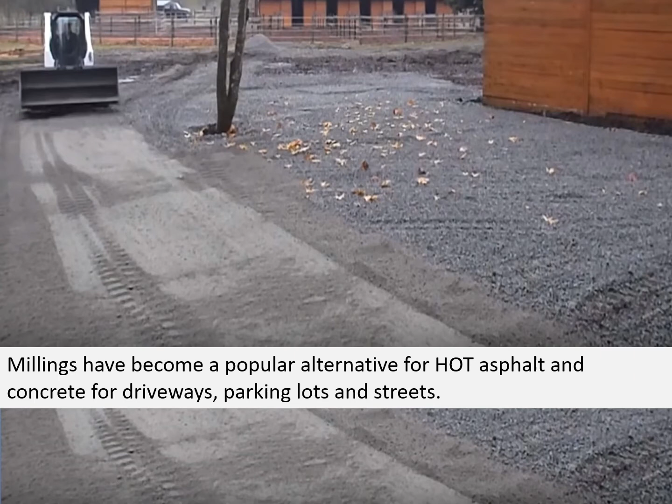In this tutorial, we'll talk about construction tips for laying and rejuvenating asphalt millings. Millings have become a popular alternative to hot asphalt and concrete for driveways, parking lots, and streets. We receive many questions in regard to constructing and handling millings. We hope this tutorial will be a benefit to you as you consider using millings for your project.

Getting a smooth, non-erodible, non-raveling, non-tracking surface has been a challenge, and these are the two most common complaints of using millings. We will share the solution with you in this tutorial. Millings have no structural strength of their own and rely on a solid base for support. When grading in your road, consider cutting in the road to provide natural support for the shoulders of the millings and eliminate or reduce the amount of dirt for backfilling and landscaping. And good drainage is very important.

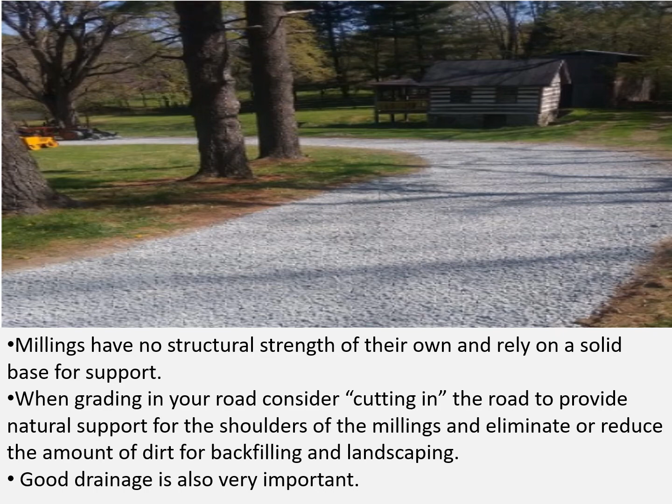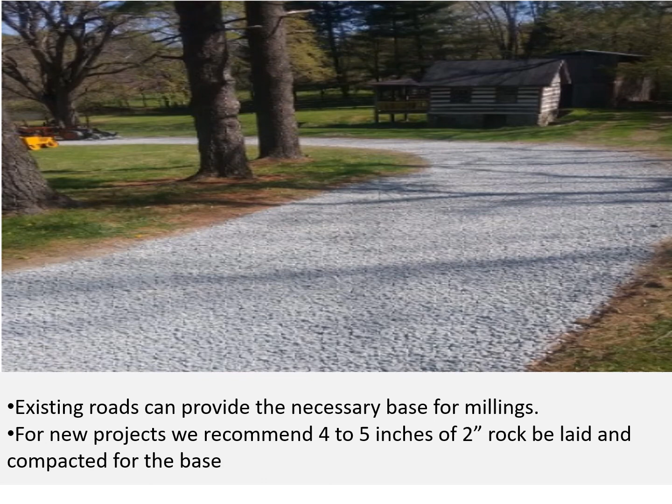Existing roads can provide the necessary base for millings. For new projects, we recommend 4 to 5 inches of 2-inch rock be laid and compacted for the base. Screened millings are preferred for a smooth finish. We recommend 3 to 4 inches of screened millings. You want enough millings depth to prevent bringing up gravel or dirt during the leveling and grading, as well as while you're incorporating the HS-E Blend.

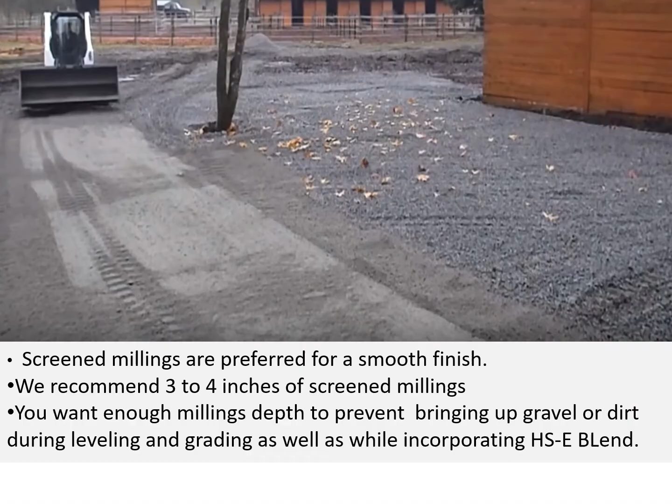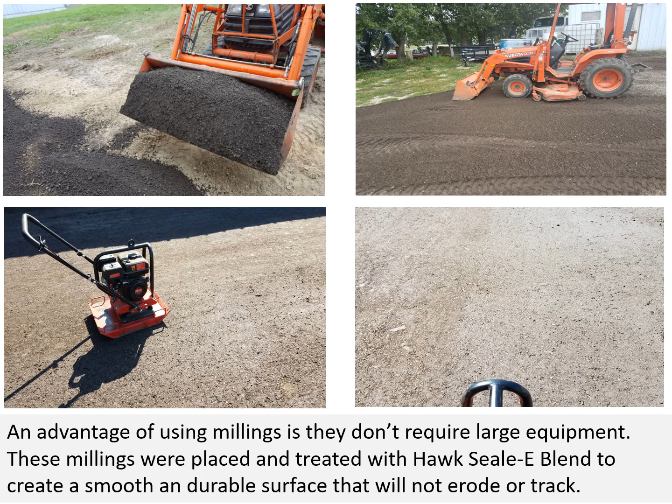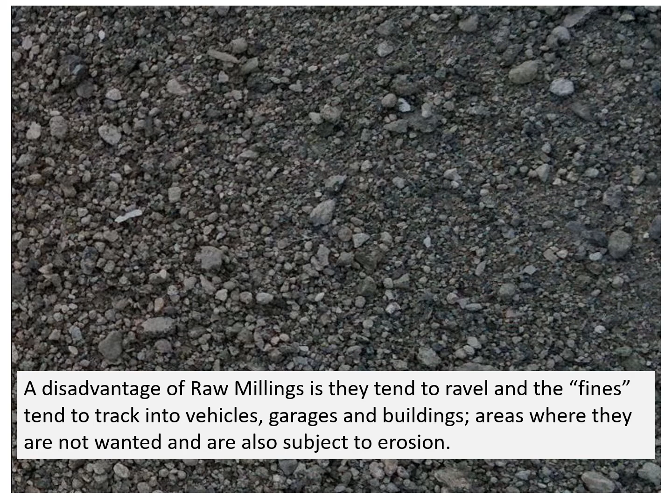An advantage of using millings is they don't require large equipment. These millings were placed and treated with Hawk Seale-E Blend to create a smooth, durable surface that will not erode or track. A disadvantage of raw millings is they tend to ravel, and the fines tend to track into vehicles, garages, and buildings, areas where they're not wanted, and they're also subject to erosion. There's nothing more disappointing than having your wife's new carpet ruined with asphalt from your money-saving millings project.

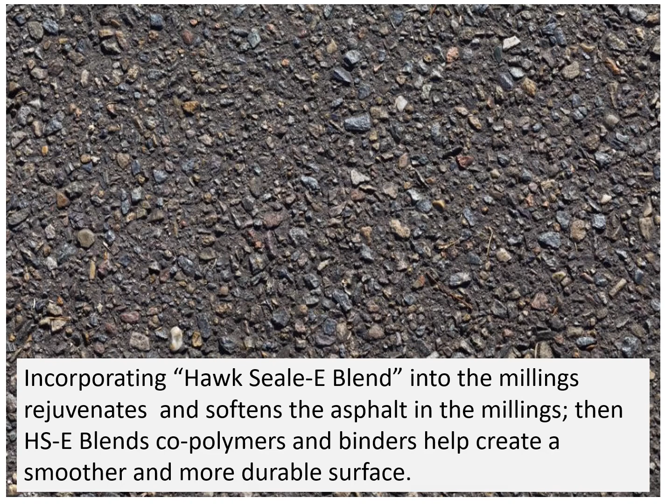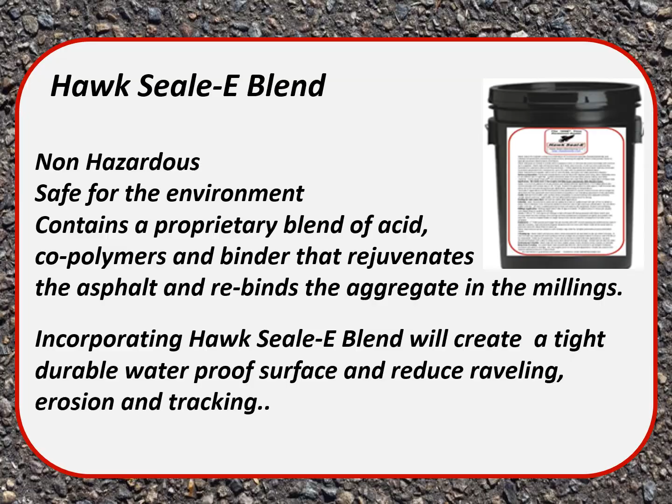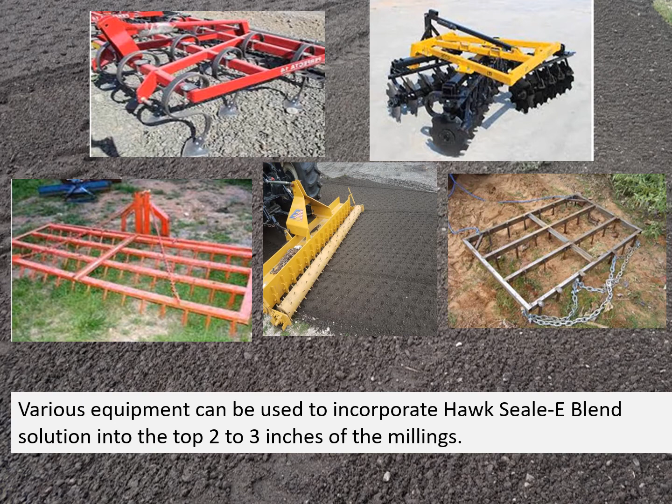A good driver can tailgate spread your millings, eliminating a lot of time and labor to prepare your project. Incorporation can be done with a variety of equipment. You can use field cultivators, discs, heavy drags, or specialized tools such as the pulverizer in the center picture. You can pull them with a small garden tractor or four-wheeler or a larger farm tractor. Basically, it's a simple matter of just getting that solution incorporated into the top 2 to 3 inches of the millings.

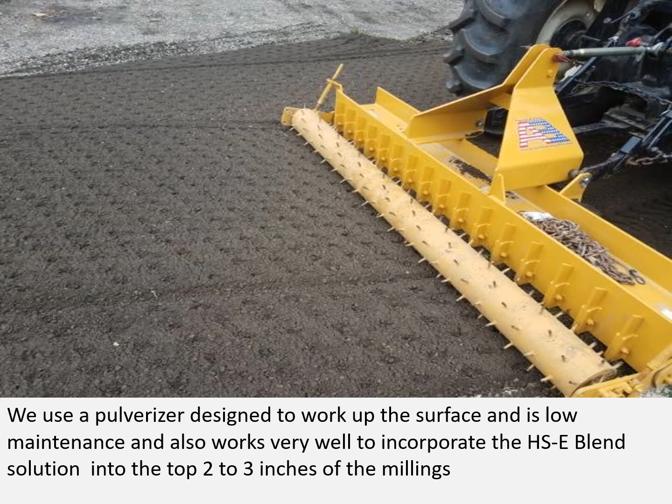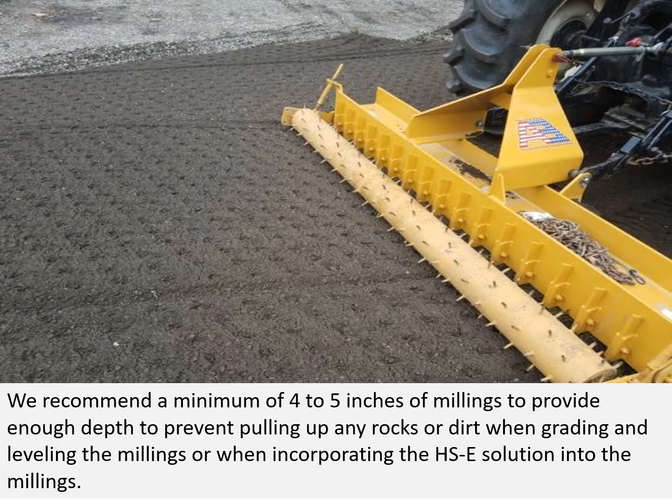We use the pulverizer. It's designed to work up the surface and is low maintenance, and also works well to incorporate the Seale-E Blend solution into the top 2 to 3 inches of the millings. We recommend a minimum of 4 to 5 inches of millings to provide enough depth to prevent pulling up any rocks or dirt when grading and leveling the millings, or when incorporating the Seale-E solution into the millings.

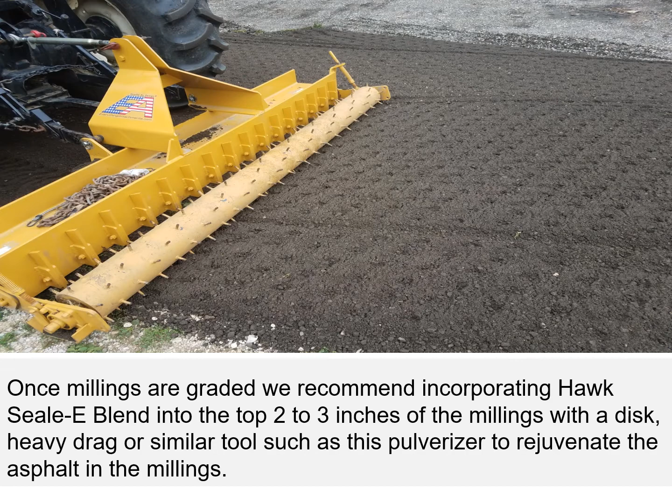Once the millings are graded, we recommend incorporating Seale-E Blend into the top 2 to 3 inches of the millings with a disc, heavy drag, or similar tool such as this pulverizer to rejuvenate the asphalt in the millings. Incorporating a total of 1 gallon of Seale-E Blend solution in 3 separate passes will maximize the saturation and penetration. When treating millings that have been previously laid and compacted, they will typically not absorb more than 0.8 of a gallon of solution per square yard before it begins to puddle and run off.

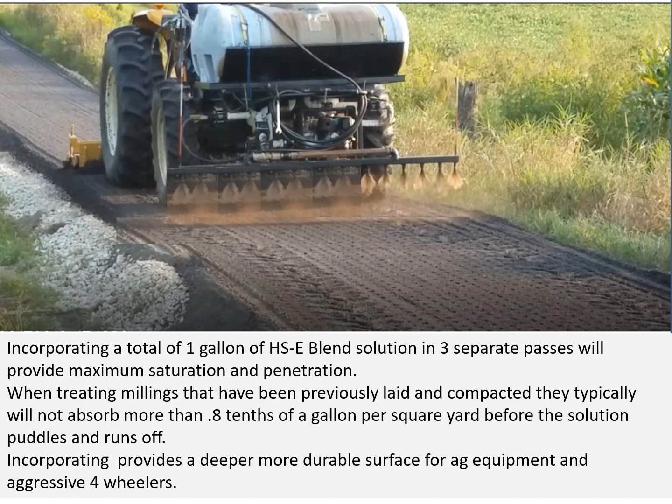Incorporating provides a deeper, more durable surface for ag equipment, aggressive four-wheelers, and probably heavy industrial areas where you have semis turning. This is the third and final pass. Notice the solution is beginning to puddle in the tractor tracks. The millings at this point will become like a slurry similar to poured concrete.

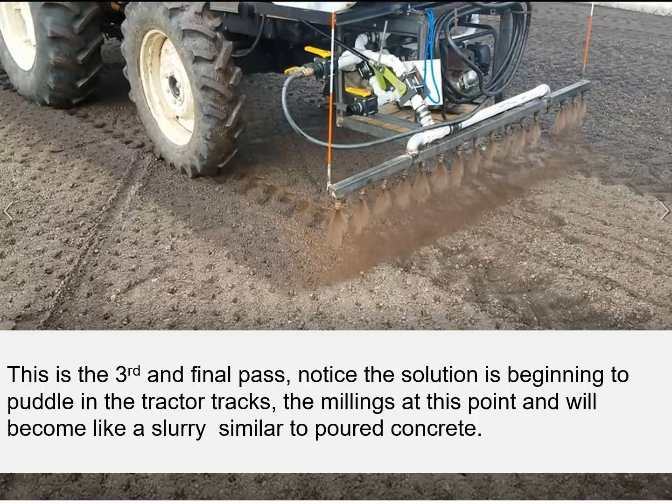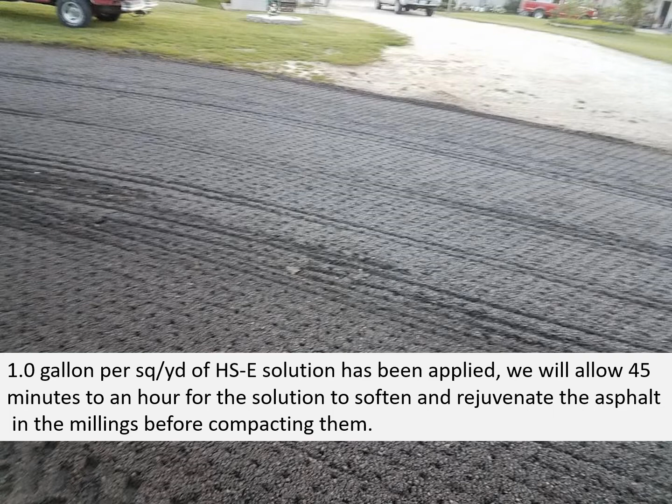1 gallon per square yard of solution has been applied here, and we will allow 45 minutes to an hour for the solution to soften and rejuvenate the asphalt in the millings before we start to compact them. The millings will need to set up enough to carry the weight of the roller without rippling the millings ahead of the roller. Otherwise it squishes out, and you don't want that. We recommend compacting the millings several times in the first 24 hours.

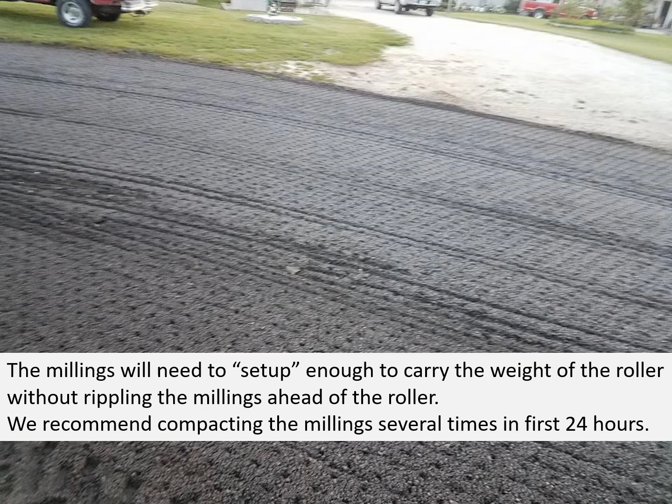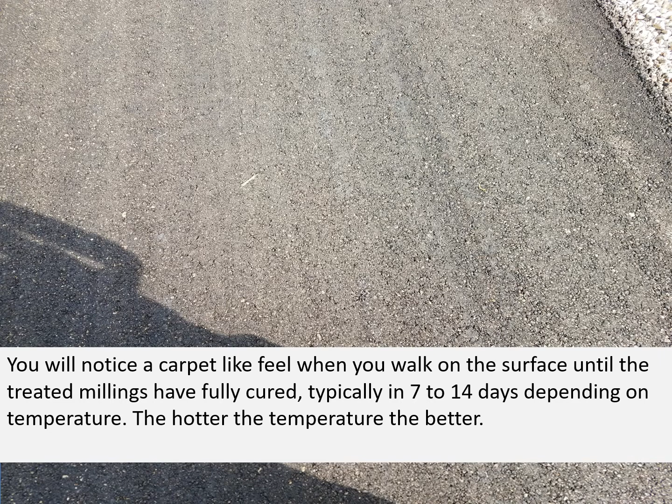Light traffic such as cars and pickups can begin immediately. Overnight parking and heavy garbage trucks and farm tractors with aggressive tires should be avoided until the treated millings have fully cured. You will notice a carpet-like feel when you walk on the surface until the treated millings have cured, typically in 7 to 14 days depending on the temperature. The hotter the temperature, the better, and the faster it will cure.

Many times property owners contact us after they have laid and compacted their millings, wanting to know if Hawk Seale-E can be used to seal them. While incorporation provides a deeper, more durable mat, you can apply Hawk Seale-E over the top of compacted millings. Some of our farm and commercial customers have worked up the compacted millings to incorporate the recommended 1 gallon of Hawk Seale-E solution in the top 2 to 3 inches. Incorporation provides a deeper, more durable surface, especially where heavy vehicles and equipment are involved.

After incorporation of Hawk Seale-E, the millings are then recompacted when the millings have set up enough to carry the roller without rippling the millings ahead of the roller. Compaction can be done with a heavy, smooth-tired vehicle as well. We recommend compacting the treated millings several times in the first 24 hours.

Previously compacted millings can be sealed by applying 0.8 of a gallon of Hawk Seale-E solution with a heavy nap or foam paint roller. For larger areas, you will want to use a simple sprayer system. We recommend recompacting the millings 45 minutes to an hour after application to tighten the surface.

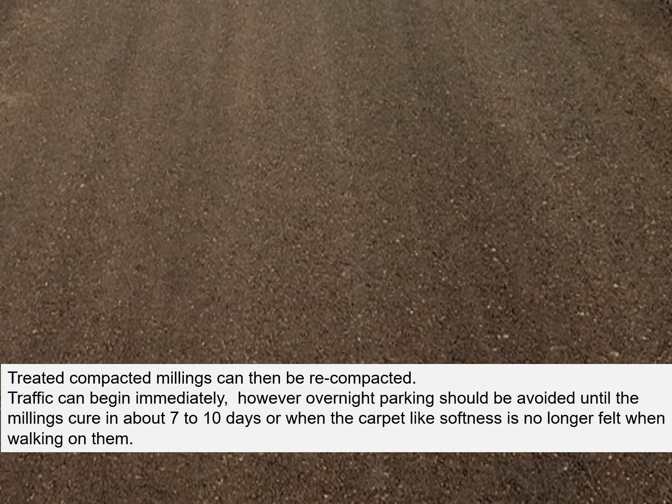In this photo, a total rate of 0.8 of a gallon of solution per square yard was applied in 3 passes. This will saturate and penetrate the compacted millings approximately an inch deep to tack down the fines, waterproof the millings and prevent the millings from eroding. Treated compacted millings can then be recompacted. Traffic can begin immediately. However, overnight parking should be avoided until the millings cure in about 7 to 10 days, or when the carpet-like softness is no longer felt when you walk on them.

This spray bar is constructed of 2-inch square tubing with 1/2-inch nipples welded every 6 inches with 80/50 fan jet nozzles carried at 16 inches off the ground. Up to 12-inch spacing can be used. A 2-inch water trash pump with 1.5-inch PVC piping from the tank and back to the tank provides circulation. A valve controls the amount of solution and pressure to the boom or wand. This setup also has a 50-foot high-quality rubber hose for the wand for using it on smaller projects in tight spaces. The tanks and booms can also be trailer or truck mounted.

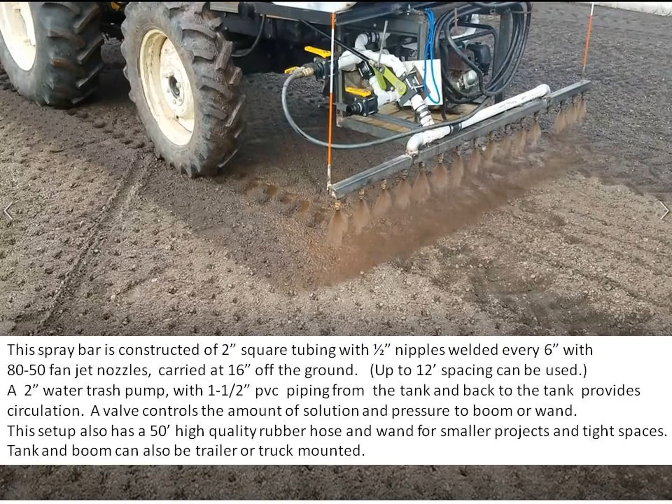Here's a simple boom setup that was constructed by one of our customers. It has a water trash pump and PVC piping. 80/50 fan jet nozzles were spaced every 12 inches. A valve in the line controls the amount of solution going back to the tank. It also controls the pressure to the boom. A T-in valve could be added to feed a hose or wand if desired.

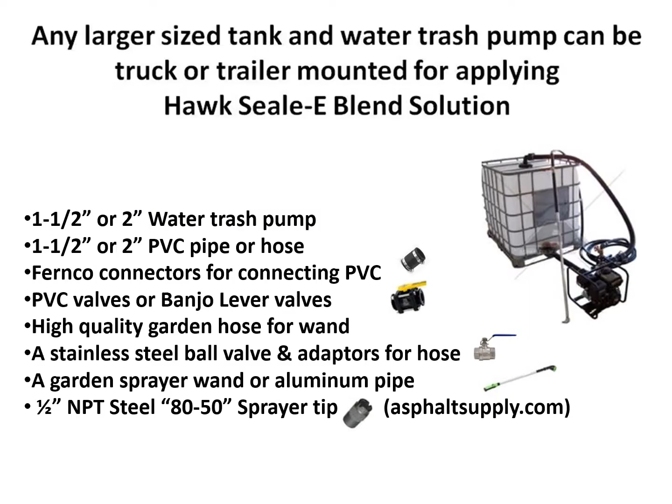Any larger sized tank and water trash pump can be truck or trailer mounted for applying Hawk Seale-E blend solution. A 1.5 to 2-inch water trash pump is all you need. 1.5 or 2-inch PVC pipe or hose will work. I would caution you, as far as hose, 1.5 is sufficient. A 2-inch hose gets to be pretty unruly and hard to work with. Fernco connectors for connecting your PVC connections on the suction side work well. On the pressure side, you want to be careful that they don't blow apart. PVC valves or the banjo lever valves work really well.

That's what we use. High quality garden hose for your wand, stainless steel ball valve and adapters for your hose to control and shut off your wand. A garden sprayer wand or aluminum pipe works really well to get this solution away from you so it doesn't spatter on your feet when you're applying the Hawk Seale-E. You can use the regular sprayer nozzle if you'd like, but if you're doing any amount at all, you're going to want a section of aluminum pipe of some sort. And then the 1/2 inch NPT steel 80/50 sprayer tips work really well.

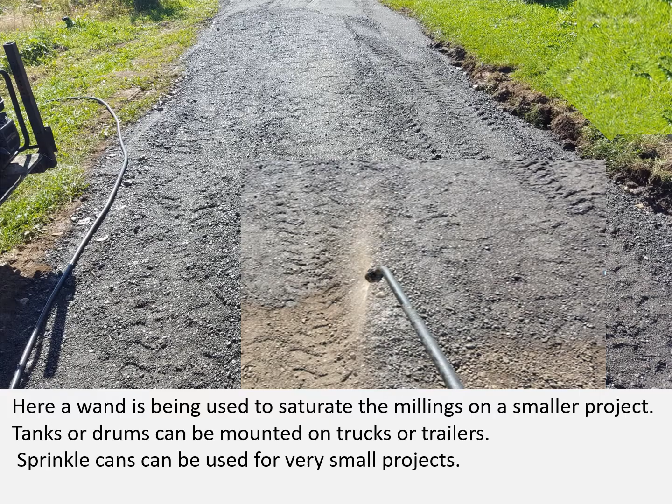Here's a wand being used to saturate the millings on a smaller project. Tanks or drums can be mounted on trucks and trailers, and sprinkle cans can be used for smaller projects. You drill out your sprinkle can nozzle and sprinkle it on. Also on previously compacted millings, you can roll it on with a heavy nap roller or sponge roller.

This simple trailer sprayer was constructed by owners of a subdivision in Michigan to rebuild their streets with millings.

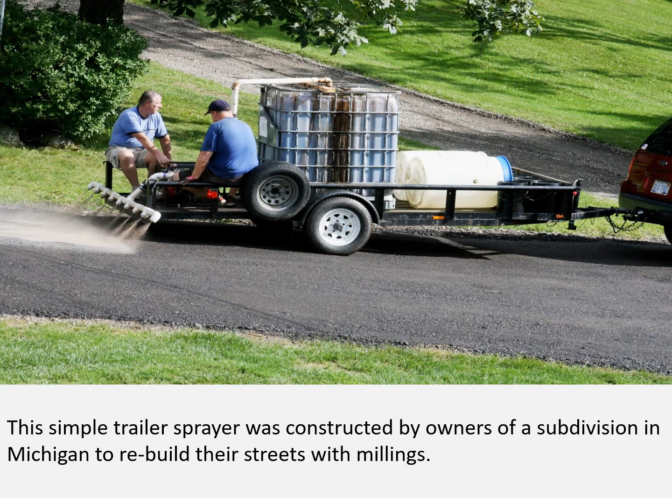Once the treated millings have had sufficient time to set up and prevent running and rippling ahead of the roller, we recommend compacting the millings several times in the first 24 hours. When compacting your millings, avoid short runs back and forth. Run your roller the full length of the project and vary your path to avoid creating ruts and ripples.

You want to compact the millings as much as possible while being careful not to over-compact and cause ripples in your millings. Allow time for the millings to firm up enough to support the roller without creating ripples on each of the second, third, and fourth passes.

The shoulders should be backfilled to support the millings and prevent them from sloughing off. Also remember, good drainage is important when landscaping.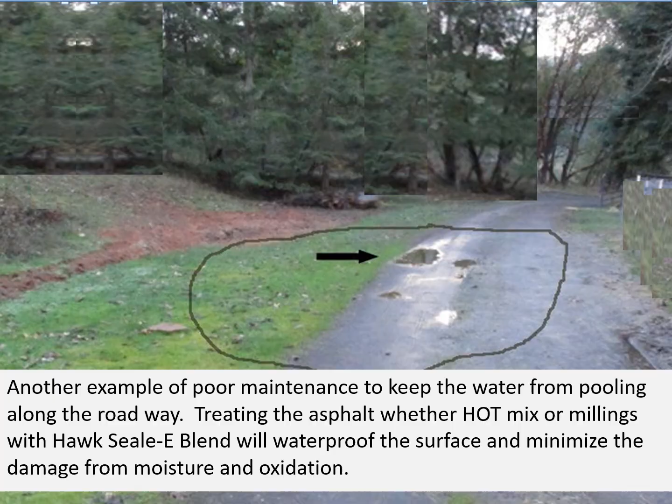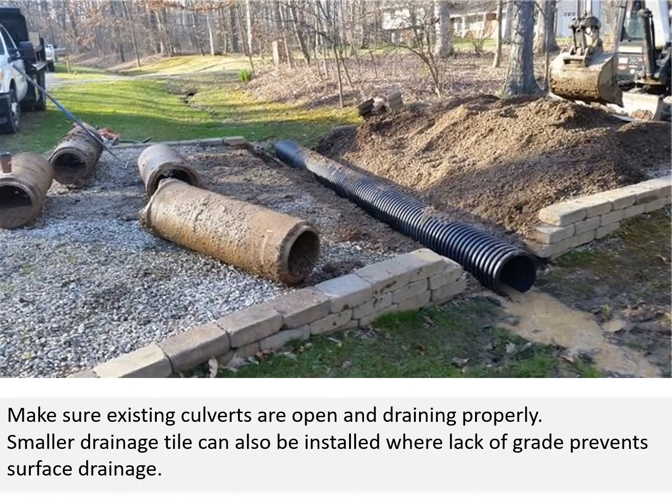Make sure existing culverts are open and draining properly. Smaller drainage tile can also be installed where lack of grade prevents surface drainage. Using millings and Seale blend to construct a smooth, durable surface can be accomplished between 50 and 60% of the cost of hot asphalt.

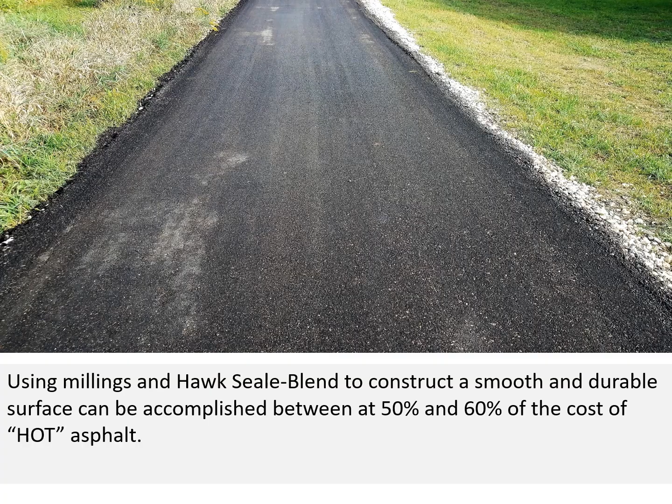Seale blend can be used as a preservative for regular asphalt surfaces. It works like Thompson's water seal on wood. It prevents water from penetrating the fissures and voids in the asphalt, which leads to deterioration. Seale blend will literally stop the deterioration and cracking of your asphalt with a one-time application of 0.35 to 0.4 of a gallon of solution.

We ship Seale blend in concentrate form to save you money as well.